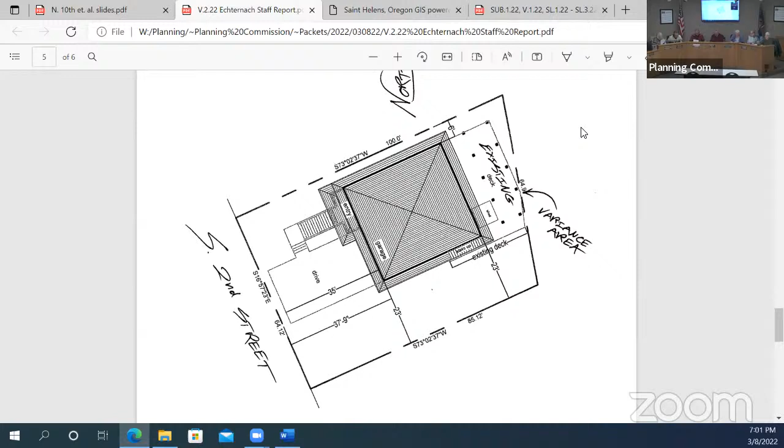7:05. Wrong, also I don't think it's 7:05. The variance is the—7:05 is variance. I'm sorry, I got it wrong. Yes, wrong one. Yeah, but you don't have the script. No, I don't, but I do have the 7:30. There it is, I'm sorry.

Started. Okay, I never want to share. Somebody, you can give a comment. What's the first here now? The talk minutes—well, I'll figure out the script from here. All right, start it again.

The time is now 7:02 p.m. The public hearing is now open. It's a quasi judicial land use hearing. The subject of the hearing is a request for a variance. The subject property is identified on the county assessor's map as lot 900 on map 4N 1W 3DB. The applicant is Jay Echternach. The owner is Jeanette Nelson.

Because quasi judicial proceedings require the observance of certain procedural formalities, we will take a few moments to cover some preliminary matters and required statements. Do the three members of the commission wish to declare an ex parte conflict of interest or bias in this matter? None? Does anyone in the audience object to the ability of the commissioner to make a fair decision? None.

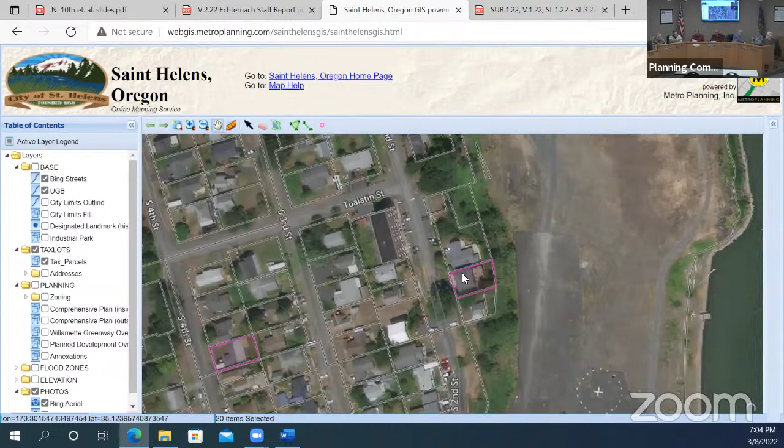There is an ability to raise an issue, including constitutional or other issues relating to the proposed conditions of approval in this hearing, in person or in writing. Failure to raise an issue accompanied by statements or evidence sufficient to afford the approving authority an opportunity to respond to the issue precludes appeal to LUBA, the Land Use Board of Appeals, on that issue, and precludes an action for damages in the circuit court.

All right, staff report. Thank you, Chairman. So tonight we're looking at a setback variance, and this map shows kind of where we're at. So this is South Second Street, just south of Tualatin. You might know this area by the salt staircase that goes down to the St. Helens owned property near the site down below. So this is the block we're looking at today, and the subject property is right here, where my cursor is.

So on this property in 2008, the city approved a demolition permit for an existing single-family dwelling, and shortly after approved the building permit for reconstruction of a dwelling at about the same footprint. At that time, it had a rear setback of 10 feet, which is the appropriate setback for this residential zoning district. Also at that time, because this is on South Second, it was reviewed under our scenic resource review chapter, which reviews new development over 15 feet in height or 2 stories, which this development is. So at both of those times, the setback was 10 feet.

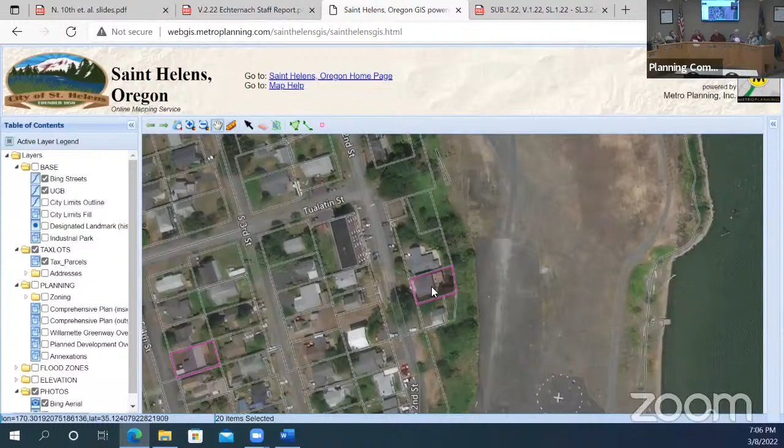More recently, we received a building permit for work unrelated to this deck that we're going to talk about a little bit later, and noticed this plan, which showed the existing deck right up to the property line, so it had a 0 rear yard setback. So sometime between 2008 and now, a deck was built and it didn't comply with the approved permits we had on file for the site.

The deck wasn't built by the current owner. Jay will give testimony. He bought the house more recently and didn't build this deck. So now we are trying to bring this home into compliance and review it with this setback.

Like with all variances, we go through the criteria, and the applicant provided a narrative along with some staff comments throughout the staff report. I'll highlight the ones I think are of relevance.

The first criteria talks about detriment to surrounding properties. I'm going to pull up our GIS to show the surrounding area. The property to the north has a deck at basically the same footprint as the subject property, so it has a similar reduced rear setback. The property to the south also goes up to, and maybe even encroaches onto, the city property with their deck. So there's precedence along this block that utilizes every bit of that yard space.

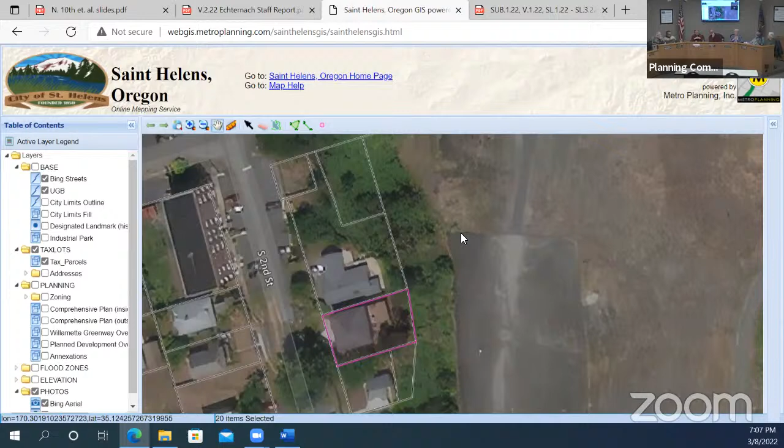Obviously it's got amazing views of the river, so it makes sense that they would want to utilize that area. As far as detriment to the abutting neighbors, arguably they're under the same circumstance, and that's what staff notes under that criteria.

There's also some photos from the deck where you can see the alignment of the deck that's built, looking over to the deck there. You can see those in the staff report. There's also no visual impact to any other neighbors on South Second. You can't see the deck from anybody in the surrounding apartment residential zoning district, and you obviously can see the deck from the city-owned property, and there's some photos of what that looks like.

There's a 60-foot drop-off between this property and the city-owned property down below. So if you look at the next criteria, I talk about how in other zoning districts that difference in topography can actually be used as a setback.

In Houlton, and in the Plaza sub-district for the Riverfront district, it says that when you have uses that are more than 30 feet above proposed commercial uses, then the height of the topography counts as part of the setback. For example, if you have a 35-foot bluff behind a commercial building, it's the same as having a 35-foot setback. That doesn't directly apply in this case, but it gives the commission a way to look at great differences in topography in terms of setback requirements.

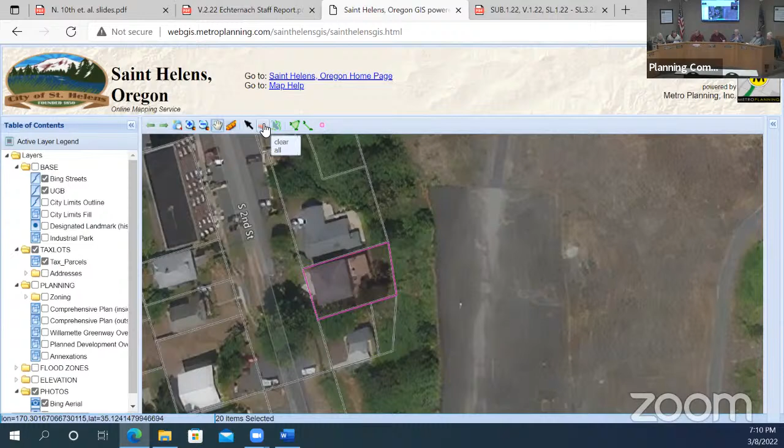Existing plans that the city approved show a smaller deck. Yeah, they approved a 10-foot rear setback.

What is the code section that would allow us to grant the variance? The same code: 17.108.0501. Can you say it one more time? Yeah, it's in the staff report, 17.108.0501. Find it—yeah, it's on page 2, right here.

One thing I would note on this GIS aerial shot is the buildings and property lines in the aerial photo aren't quite aligned, so they're not, for example, that close to the front property line. They're a little skewed there. Runoff doesn't start at that back line—it does, it's right about here.

Basically this deck is shifted; this aerial image is quite awful, honestly, but it does show that this is in line with other neighboring decks. That was the purpose of bringing it up. Also, those three properties are the only properties on the east side of South Second, so there's not a whole lot of impact to surrounding neighbors because it's only two.

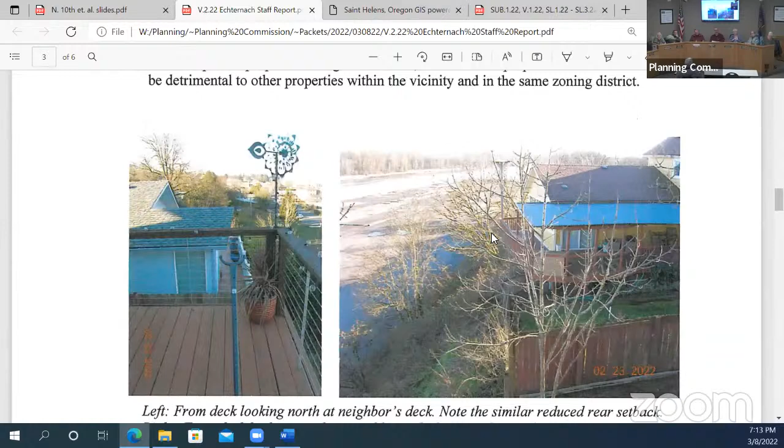I might add, those pictures aren't really revealing the truth. My neighbors to the north and south — I would argue if you went out there, not only is their deck on the property line, but their house is on the property line. So if I'm encroaching by a deck, theirs is slightly more egregious, and I'm not here to defame them. I'm just trying to put it into context.

The view is spectacular. I've met both neighbors. They saw the variance report. They encouraged and were excited for us to be in the neighborhood. So I appreciate your consideration.

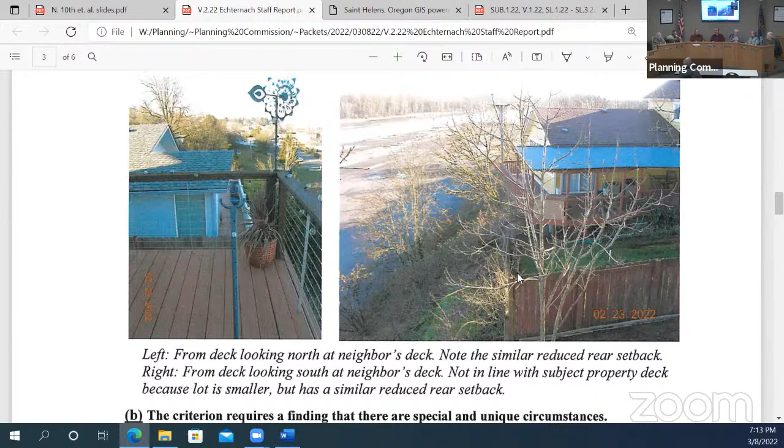Questions of the applicant? Thank you, appreciate it. Is there anyone that wants to testify in support of the application?

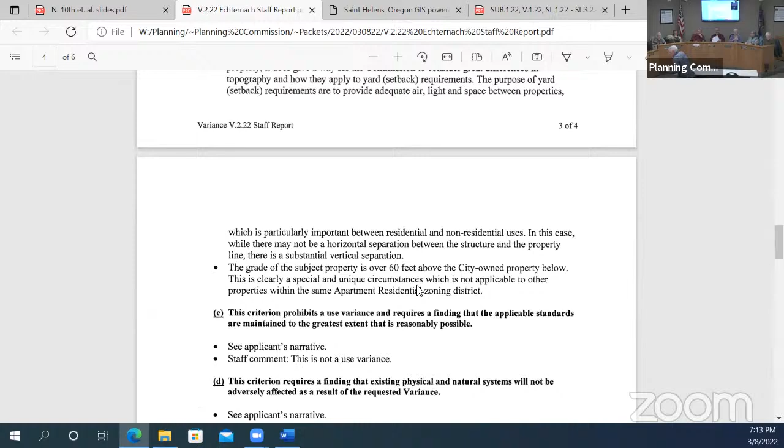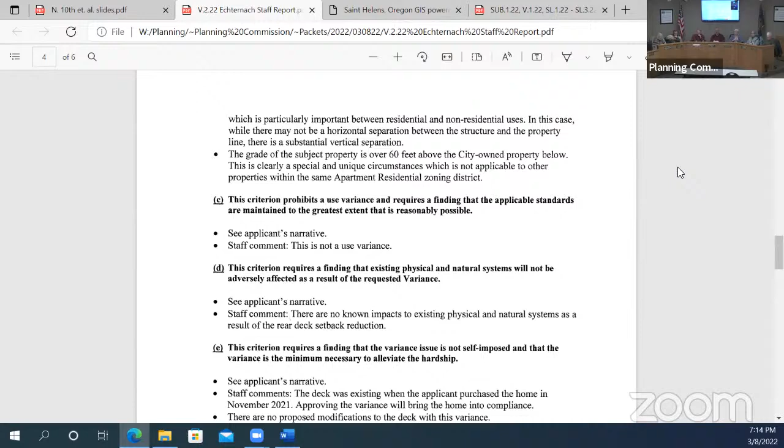Anyone that would like to give neutral testimony, neither in favor nor against? Anyone who would like to testify in opposition to the application? All right.

No further questions to the commission. No further responses to staff. The public record is closed. The matter is returned to the table for deliberations and oral discussion.

We can add a little bit of context. This home was approved for tear down and rebuild back in 2008 or so, maybe 2009. At that time, inspections were done differently — the building department did the inspections, and planning did not. This isn't the only time I've seen a deck that's made me go, huh, this is interesting. We actually had some houses on Snow Street in the Ridgecrest subdivision with decks that got really close to a protected area and weren't on the original plans, and anyway, it was kind of messy. So you could argue it was a messy way of doing things back then. We do inspections with the building department now.

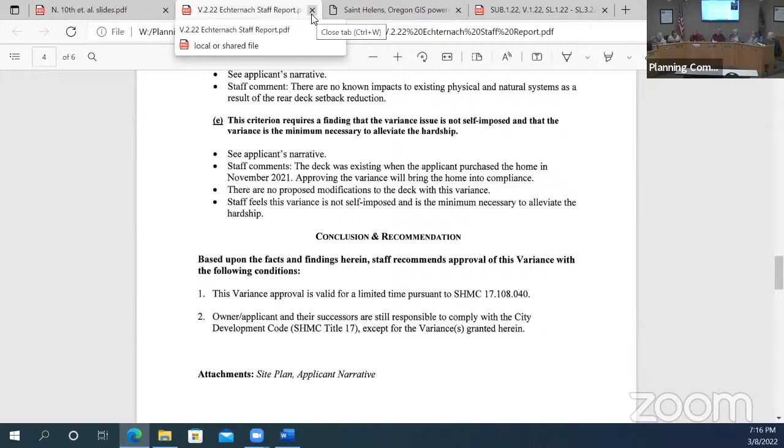Oh, I have to read one, sorry. The final written decision of the planning commission may be appealed to the city council. The notice of decision will be mailed to all persons who testified or submitted comments. The appeal deadline will be included.

Okay. Now I got the right script for the right thing.

It is now 7:17 p.m. The public hearing is now open. It's a quasi-judicial land use hearing. The subject of this hearing is a request for a planned development. The subject property is identified in the county assessor's map as lot 700 on map 5N1W33. The applicant is North 8th Street LLC. The owner is the same.

Quasi-judicial proceedings require certain procedural formalities. We'll take a few moments to cover some preliminary matters and required statements. Does any member of the commission wish to declare an ex parte contact, conflict of interest, or bias in this matter?

I'm not going to declare a bias, but I will declare that I applied to be a member of the Elks Lodge, and this has not come up. And I'm not going to declare a bias, but I will state that I don't think it's going to affect me in any way.

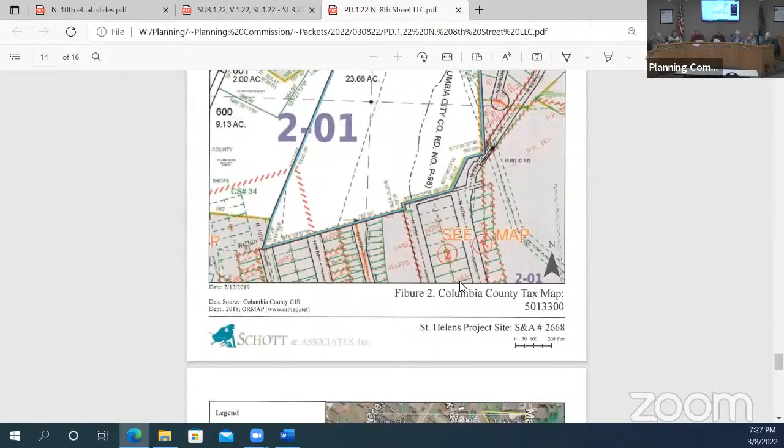The other thing I want to note is that one of the important bases for allowing this is the wetland encumbrances. This is the approved wetland delineation from the Department of State Lands, and you can see there's quite a bit of wetland complex on the east side. As you saw with that proposed plan, a lot of that's being preserved. But you do have wetlands on the other side too, that have to be mitigated. So there are just a lot of wetlands going on. It makes sense to have that overlay so someone can have an economic use of their property.

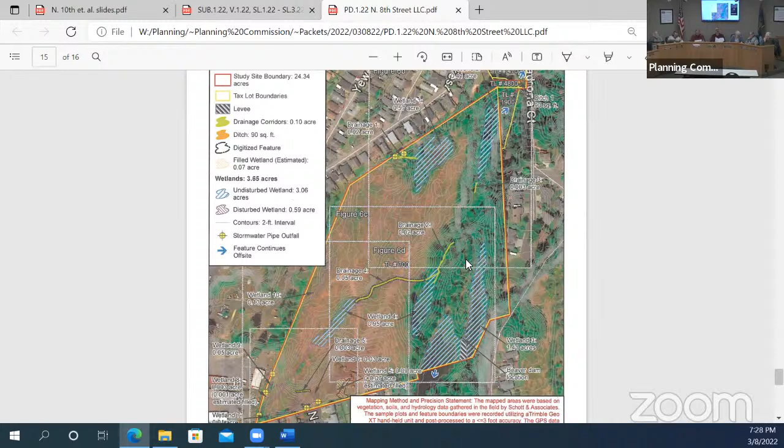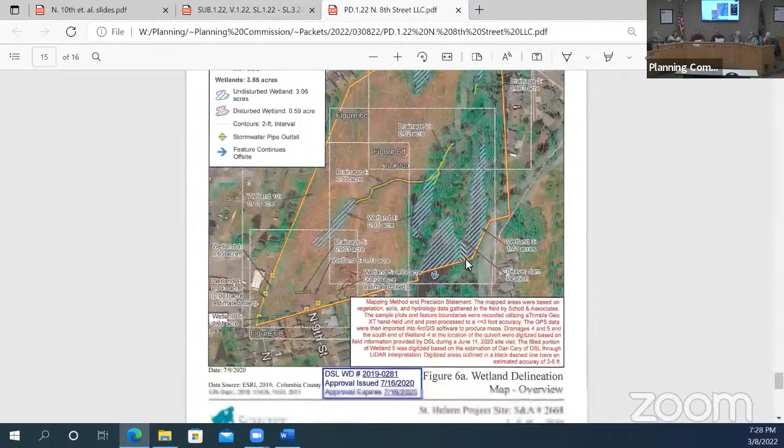Because this is an overlay zone, I know there's always temptation to want to talk about the streets and the lots and all that stuff. But remember, this is a zoning map decision, not the subdivision decision itself. And that's what I got.

Questions of staff at this point, what you said, applicant? I have one question. So, Jacob, the concern of precluding mobile homes—that would not be allowed?

That's correct. So what that means is that overlay zone enables us to apply flexibilities. And if it was approved as recommended, the caveat is we want to make sure it doesn't preclude manufactured homes. So any development, be it this one or development B in 2 years, we would need to check that box.

So spot zoning or something like that? You could consider it like that. This land was kind of set aside for that purpose, and it would be kind of like washing away the spot, I guess. So yeah, you could consider it akin to spot zoning. That's what I kind of got from you.

Thank you. Could you clarify what the planned development overlay zone allows them to do differently than the zoning that it is right now?

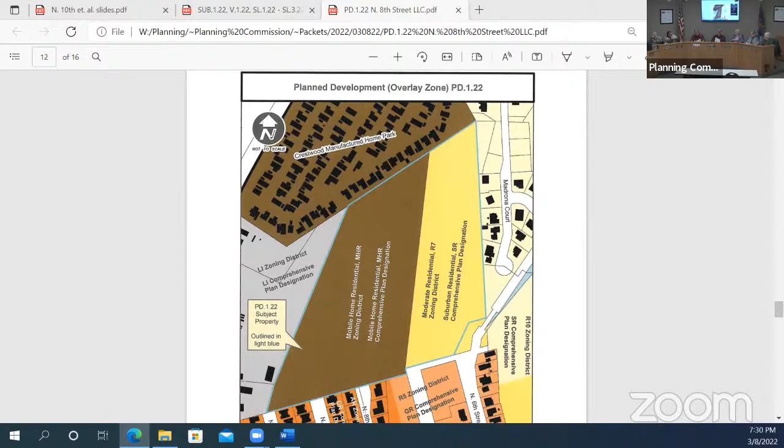Sure, let's be clear on that. They have a table that shows some of that, and it summarizes it really well. The main thing I'd focus on is the standard on the very left, and then the second column from the right is the plan development overlay flexibility. Where it says yes, it does allow flexibility; where it says no, it doesn't. So for minimum lot size, they could pick a minimum lot size less than the normal standard, which would be 5,000 square feet. They could say there is no minimum lot size, or they could pick a smaller number. Same with the lot dimensions.

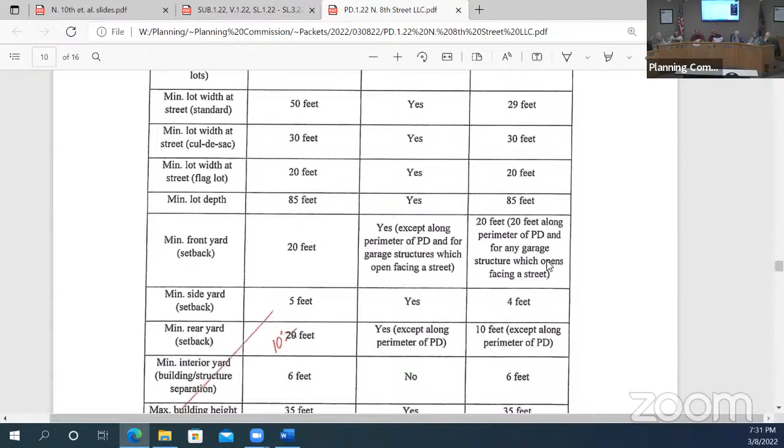And yard requirements. Now, there are some things that cannot be exempted, and a critical one that an applicant needs to think about for their final product is lot coverage. That maximum lot coverage cannot be amended, so you don't want to create extraordinarily small lots where you're still subject to that 40% lot coverage, and you're going to have not just a tiny home, but a super tiny home.

Are we then on this one doing the manufactured home zoning with R7 on part of it, or are we just doing the overlay? This is the overlay. Okay, so the underlying zoning stays the same. We're adopting the overlay, and these standards here are what they're proposing.

Right, I read those. But if this project didn't make it, or they just gave up on it, someone else came in, they could apply their own set of standards as allowed by the plan development overlay.

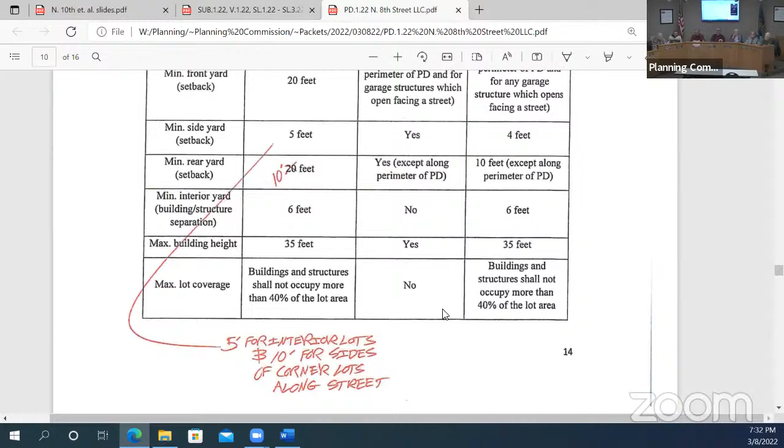So Jacob, the example of the plan that we're not talking about yet shows not full use of the property. There's a lot of open space. Doesn't a plan unit development require some open space? You can cram it all together here, or you have to have some open space from another part of the property. Is that how that works?

Well, the city of St. Helens, in its older version of the plan development standards, had some mandatory minimum open space. You've encountered some of that because we still deal with those old decisions. Meadowbrook is a good example we've dealt with recently, approved under those old standards. This one doesn't explicitly have a minimum open space, although in the state's definition of plan development, it says usually there's open space associated with it.

But it's common for us, because it's a good tool for properties encumbered with wetlands, that the wetlands end up being that open space. Are you saying that with the overlay, we're basically deleting other requirements of setbacks and minimum lot square footage, and enabling a developer to make that decision? Yeah, so you could adopt the overlay, and let's say they walk away, someone else comes in and says, I don't want those flexibilities, I don't want to use it. Then it just sits there, but it does enable those flexibilities as highlighted in this table.

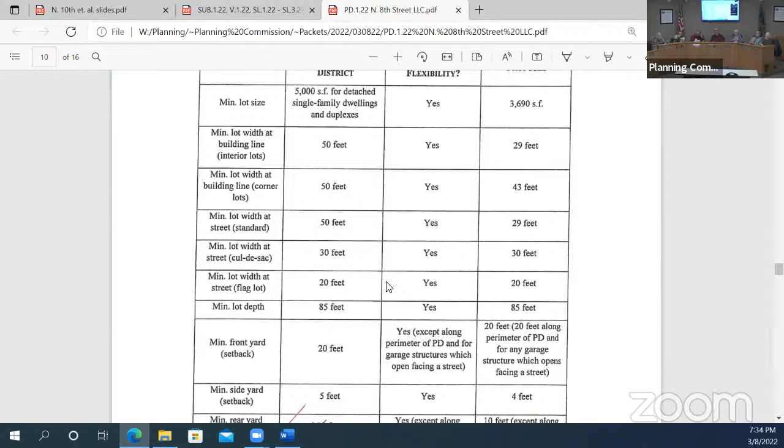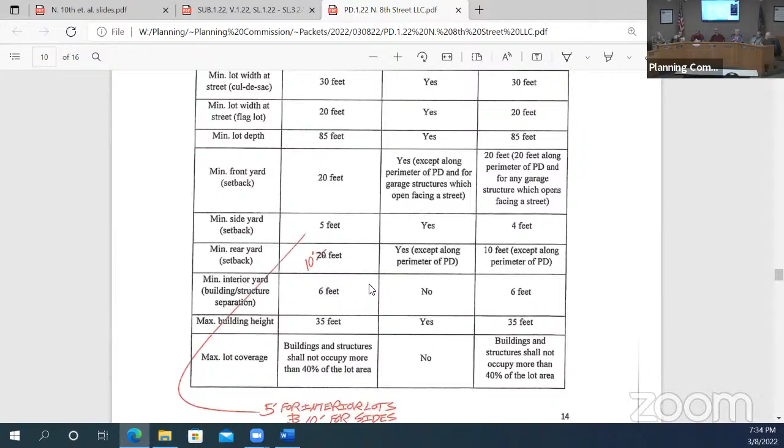And an important thing to consider is density. That's a very important tool this plan development overlay allows, when you have all this encumbered area, to try to meet a reasonable density based on that. In this case, their density calculations show over 100 lots possible, because there's the wetlands, but then there's all that non-wetland area in between the wetlands. That, if you're just doing a calculation, is fine, but to work around the wetlands, you'd have to impact them.

Without that, they wouldn't get very close to even the density proposed. Any questions of staff?

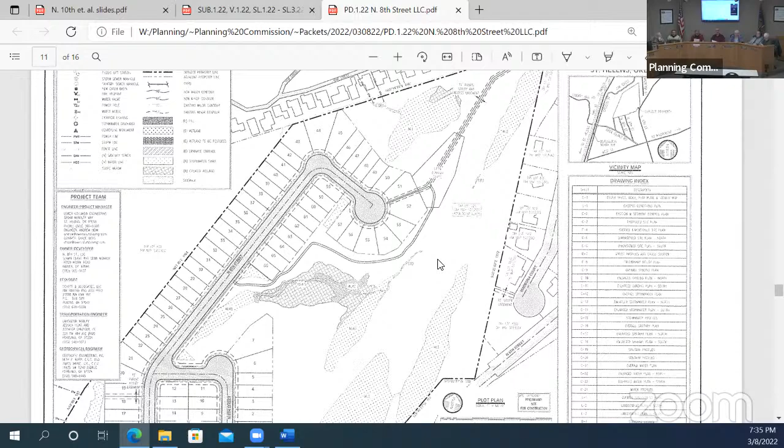Let's hear from the applicant. Good evening, folks. Good to be here in person and see everybody.

I won't get into too much detail. My name's Andrew Neamy with Lower Columbia Engineering. And I'm Chase with Lower Columbia Engineering. I think staff did a great job describing the proposed application. The only thing I'd elaborate on, and I'll try to refrain from getting into the details of the next hearing, is Jacob's point about the densities.

We haven't been involved in this project throughout its duration, but when we stepped in, it was in transition, with the required joint permit application process needed to allow impacts and work around the wetlands on the site. It was realized that the density previously proposed was too aggressive, and it was going to have, even in a short version, a long drawn out and complex process.

But in quick summary, the previous density was really going to be hard to permit at the state and federal level. Based on, Jacob, to my understanding, bringing up this option with the overlay zone, that afforded us the ability to have a bit more flexibility to minimize the impacts to those wetlands. So basically we regrouped and came up with a proposal with less overall density through this overlay zone option, allowing for less impacts to those wetlands, which I think is a win-win. In my opinion, it makes the property pencil out as feasible for improvements, striking that balance between utilizing the property and minimizing impacts to the existing wetlands.

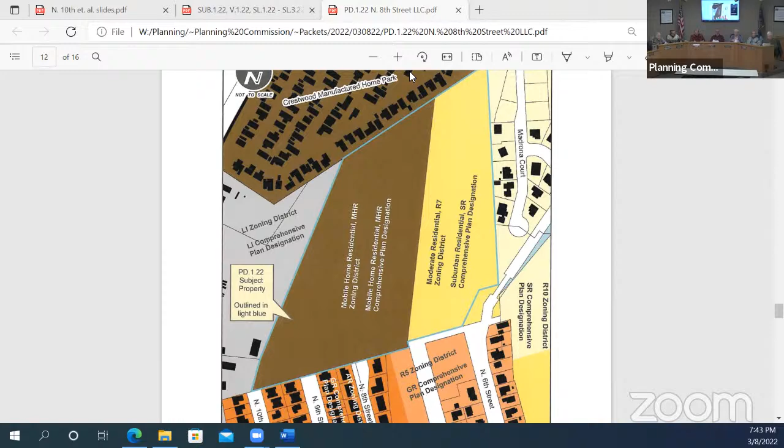Notice of decision will be mailed to all persons who testified or submitted comments, and the appeal deadline will follow. For this decision, we need a recommendation. Yeah, so this overlay will go to the council on April 6th.

The subdivision that we'll tackle in the next public hearing is within this group's authority to make the final decision. I know it sounds wacky, but to make it clear, the things these people presented today are in our jurisdiction, or will they go to the city council?

The hearing we just had for the overlay zone needs to be approved by the city council because you need an ordinance to amend the zoning map. The city council approves ordinances, not the planning commission. So if what we have done so far has disturbed somebody, they can come to the city council and express what they want.

So by 8 o'clock, is everybody here that wanted to be here for this hearing? This subdivision? They went outside - go with them. Everybody's here, I think they're back in.

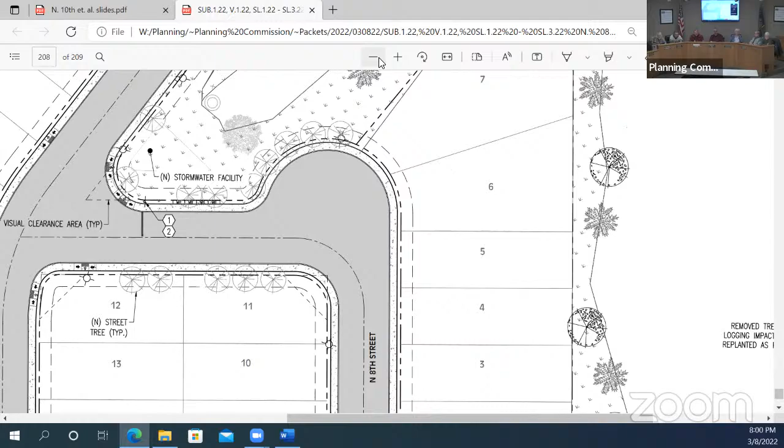Wait till 8 o'clock. 7 seconds according to my watch. I'm going with that clock. She's on it - 10 seconds off. 10 seconds off, yeah. Time is... clock went. Computer says 8.

Public hearing is now open - the quasi-judicial land use hearing. The subject of this hearing is a request for a subdivision, preliminary plat, subdivision variance, and sensitive lands permits. The subject property is identified in the county assessor's map as lot 700, 1900, 1901, on map 5N1W33 and 5N1W. The applicant is North 8th Street LLC. The owner is Sean Clark, Deanna Womack, and Elks Lodge Homeowners Association in St. Helens Lodge, number 1999 BPOE.

Because quasi-judicial proceedings require the observance of certain procedural formalities, we'll take a few moments to cover some preliminary matters and required statements. For this, does anyone wish to declare ex parte contact, conflict of interest, or bias in this matter?

I declare that I've applied to be a member of the Elks Lodge. I didn't know anything about this application at the time I applied, and I had not had any ex parte communications with anybody about it, and I don't think it's going to affect me. As I said in the previous hearing, I work for the Oregon Department of State Lands as aquatic resource coordinator, which means I'm the permitting guy for this county, and I was heavily involved with the permitting for this development as proposed today. I will try to keep my comments strictly to the proposed development, and if the applicant has any issue with me being up here on the commission, please state so. I do not. Okay, all right.

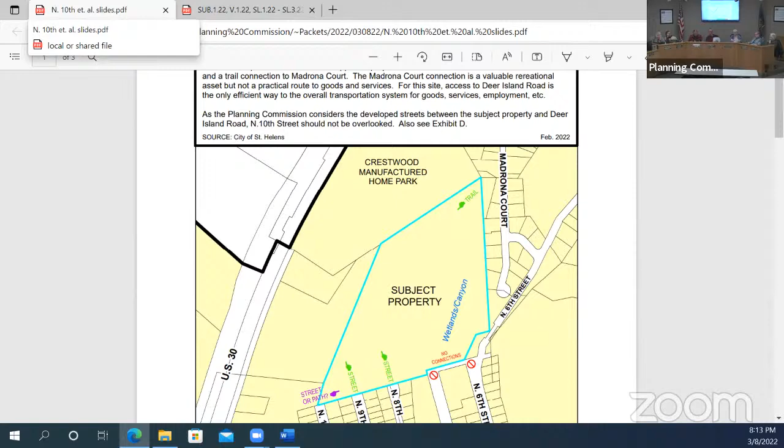Another thing to discuss, and I'll talk about this in greater detail at the end of my presentation of the staff report, are blocks. We have standards for the maximum perimeter of a block, which is around 1,800 feet. You have to use your imagination so we don't flip through a bunch of slides, but most of you probably know, especially those who live on these streets, that the 8th and 9th Street legs terminate as a segment of those streets between Deer Island Road and the subject property. That creates a partial block, and they are completing that block, with a perimeter a little above what's allowed. That's fine, the code says when things are funky we can give some of those allowances. No issue there, it's great that they're completing the block.

We do need to talk about the block bounded by 10th and 9th Street, but I think that's going to be easier to compartmentalize into discussion at the end, when we talk about 10th Street. So we'll get into that later.

Utilities, let's talk about utilities really quick. Water is easy, it's available from 9th and 8th streets, and water is pressurized. If the others were only that easy.

Sanitary sewer is not so easy. I think the applicant would love to be able to extend the sewers that are right there in 8th and 9th Street, but the problem is they're just too shallow. As you know, that old saying, 'it runs downhill,' and that's how it works in our system. So when it's shallow and you have all these homes, you don't really have any downgrade to go with. So the applicant had a couple choices. The option they're pursuing is connecting to the pump station, or near the pump station, in Madrona Court.

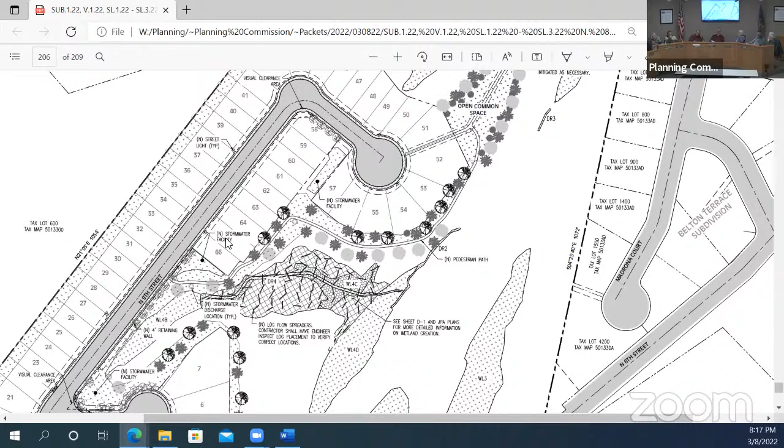Then there's stormwater infrastructure. Storm is commonly a concern of neighbors in subdivisions, and in this case you're not only dealing with the storm, you're dealing with the health of the wetlands. So you'll have your typical piped infrastructure for conveyance purposes in the street, and then a variety of vegetative bioswales, 4 in total, which are identified there - 3 of them on the east side, and 1 on the west side.

If you read the report in detail, you'll see that the city does not want ownership of those, but we'll take ownership of anything in the street, which is typical. So that's how stormwater is being handled. We do have a preliminary stormwater report, but we will need a final report, which is typical of subdivisions following some preliminary plat approval. So that's a brief on utilities.

There are a couple different methods to complete the subdivision and be able to get building permits. For a long time with the city, it was complete everything, and then we can get your final plat recorded, and now you have a bunch of lots. That changed in 2020 when Oregon House Bill 2306 was passed, which means we have to allow an option for certain things to not be done to allow that final plat, and it just involves more financial guarantees. In the city, we still haven't had someone pursue that option, but it's written in the decision. So if you were reading a bunch of stuff that looked kind of weird and it referenced that House Bill, that's what I'm talking about.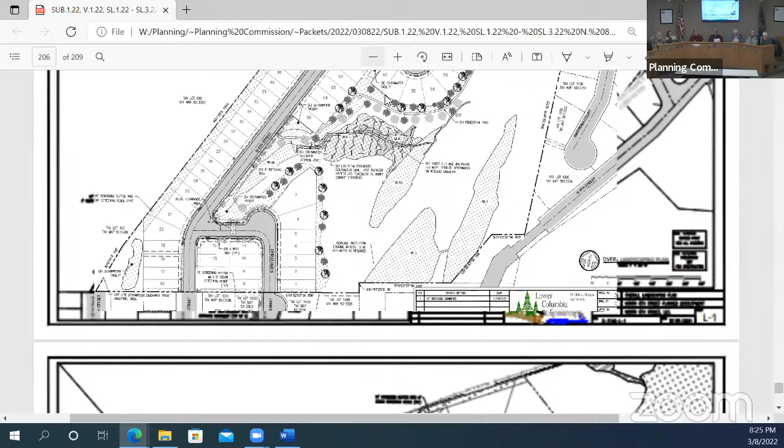Let's talk about the subdivision variance really quick. Let's scroll out a little so we can see the whole plan. The subdivision variance is for the cul-de-sac. Our normal standards call for a cul-de-sac no longer than 400 feet, providing access to no more than 20 dwelling units. In this case, the cul-de-sac exceeds 1,000 linear feet and provides access to 44 lots, so it's much larger than our standards, which is why we needed the subdivision variance.

Because of the constraints for the wetlands, the justification for the variance, as far as staff sees it, is there. They really got hammered trying to get something to work, and it just so happened that everything was forced to the west side, resulting in this layout that you see here. So as staff, we're not frowning on the variance.

There's one thing of note and one thing of consideration regarding that. One is good old Oregon Fire Code raising its ugly head, section D107, which is described in the report. Once you have a certain amount of lots, I think more than 20, with only one access, they are required to have a sprinkler system. In this case, because of the particularly long cul-de-sac, it creates that situation. If there was a secondary fire access from somewhere, that could remedy it, but a fire access needs an all-weather surface, 20 feet in width, which is a lot more than a sewer line and a trail. So the sprinkler issue just kind of presents itself in this design.

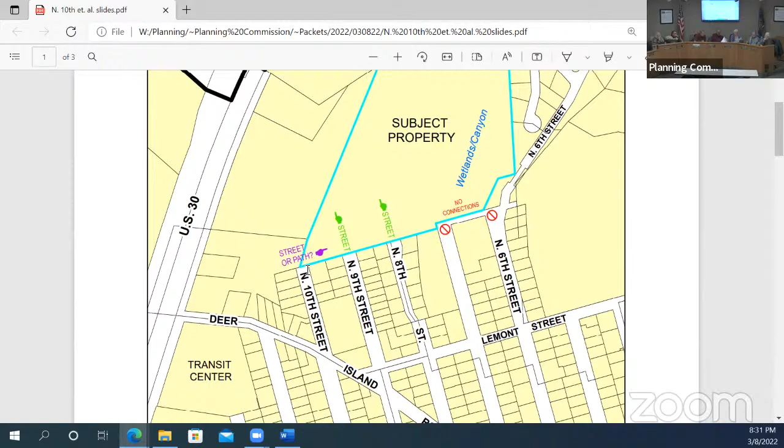This subdivision was really complex. In some of our preliminary meetings, there were comments here and there about needing to think about 10th, but we never really hammered that out—we focused on a lot of the other stuff. What we do with 10th can relate to how we look at 8th and 9th Street and all these new impacts on those roads.

In this exhibit, I'm going to talk about four potential options for the Planning Commission to consider. This is talked about in general in the staff report, but it's not organized the way I'm organizing it for this presentation.

The one thing that's automatic is to dedicate the right of way—that's why I have this highlighted in yellow—to advance the northerly extension of 10th Street. That's easy, I think that's on the table regardless. There's about 47 feet of the 10th Street right of way that abuts this area. So that's at least what I see as a default condition.

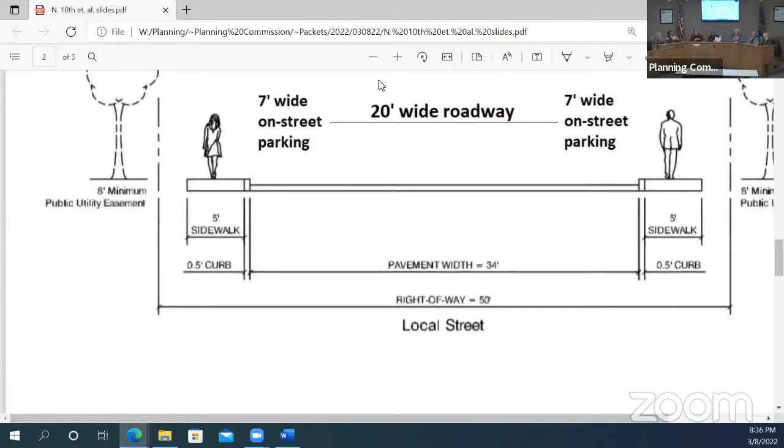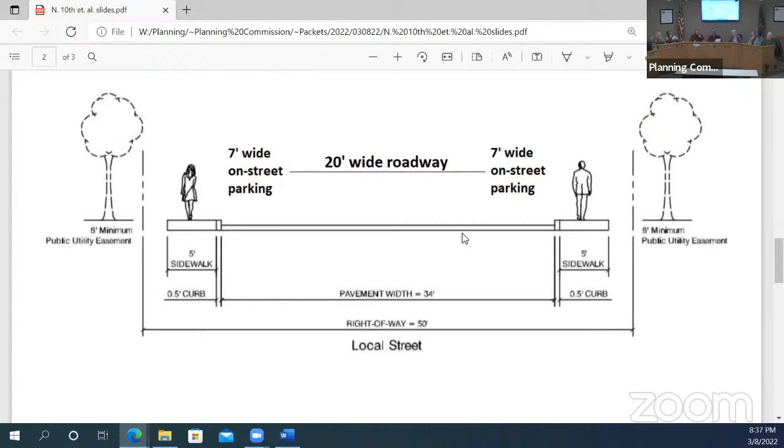So if we go to the next slide, there's two things to talk about here. This issue we're transitioning to is, let's look at 8th and 9th Street now and think about what this is gonna result in. To do that, we have to look at our local street standard, illustrated here: a roadway width of 34 feet, for a 20-foot roadway with parking on either side, and a standard 5-foot sidewalk. So that's our base that we're comparing existing conditions to.

So the question here with the new anticipated traffic, should that be considered? One thing to think about is the level of stress for a pedestrian. Say you have a 23-foot wide area, and it's not 23 feet wide everywhere, more pertaining to 8th and 9th Street. But say you had a lot more traffic and a 23-foot wide paved area with a couple cars coming by, that leaves 3 feet of area for the pedestrian on the same grade as the vehicles. Higher level of stress.

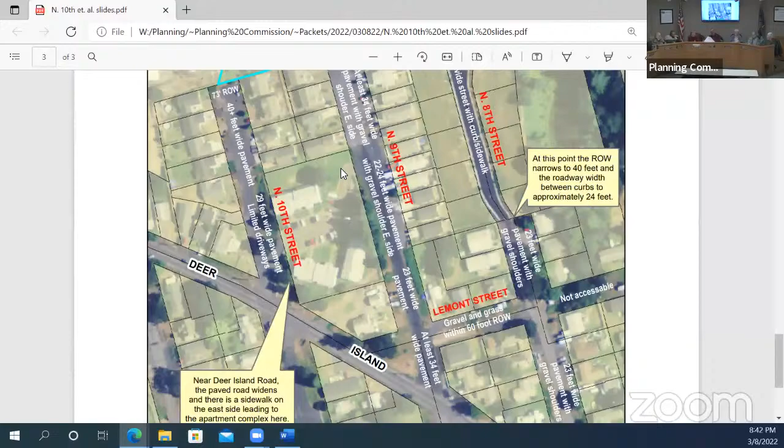Talk about an easement, halfway from this street over toward Bluff Street, two blocks. And it wouldn't have to be there, it could be at the southern end of lot 16.

So how are you gonna close that? There are wetlands. That wetland is not the existing one, that is proposed manipulation of what is there now.

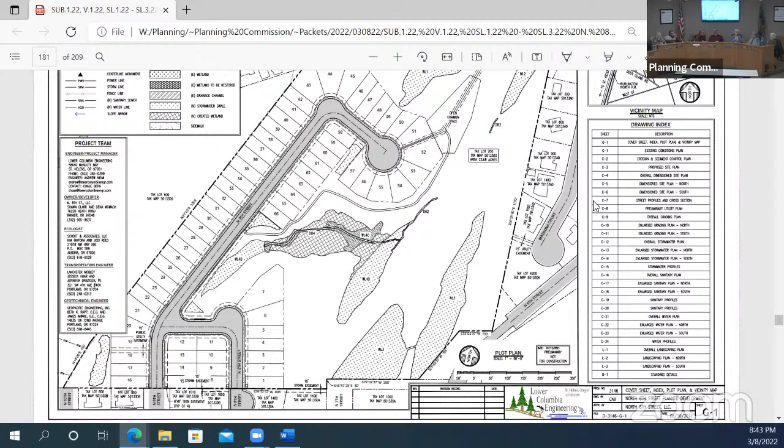So that's what's existing. You can see that the proposal is to manipulate what is there. This is a preliminary proposal, subject to change based on the requirements of the code as set forth. So there's an opportunity to manipulate, at least as far as I know. We'll see how the applicant responds to that.

We can ask more questions later. My question was, why don't we ask specific questions so that we're about the application? We can ask specific questions down later.

Let's have the applicant's presentation, and some testimony from the audience. People have been waiting patiently.

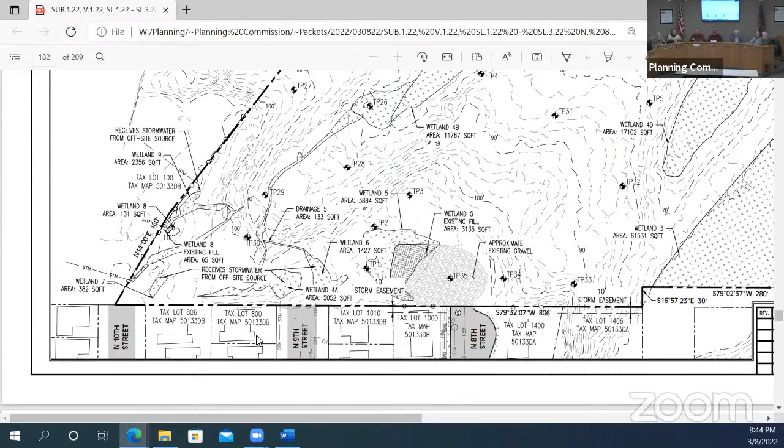Just let me know which one you'd like me to go to, if any. Probably back down to where you were at there, Jenny, on that landscape plan. Okay, give me a second.

Jacob, excellent job on a very complicated staff report. As you guys mentioned, this is a project that's been contemplated by our client for years, and we're a recent addition to the team. Prior to our involvement, there was a much more aggressive proposal in consideration with some of the state and federal agencies with regard to impact to the wetlands.

This is a much less aggressive approach. We're probably walking a fine line between something that's feasible economically, because the densities are pulled back quite a bit from what you'd typically go after in designing improvements to a piece of property like this. And of course, there's a lot of costs associated with working around these wetlands and the bedrock that is inevitably going to be dealt with on site. So we're walking that line between a project that is or isn't economically feasible.

So we're trying to minimize the amount of intangible expenses in the design process, with regard to what could be proposed. Like I mentioned, much less dense, so those traffic impacts will be less than they could otherwise be.

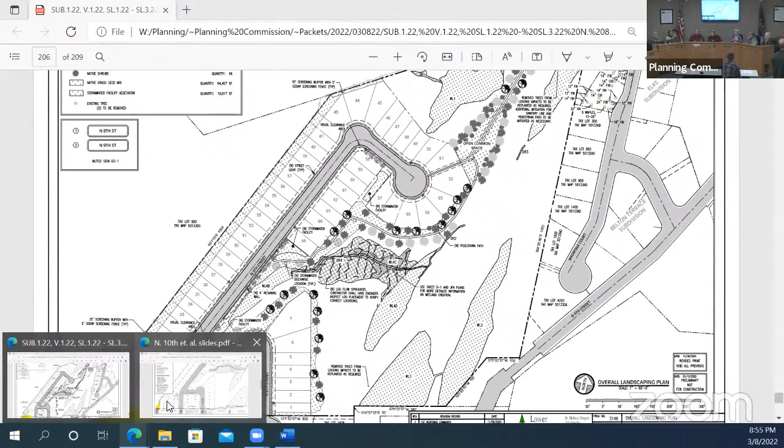I'm just throwing this out here. I don't know the developer's thought about this, but the feasibility of some kind of fee on the buyers of the properties to try to fund the sidewalk project or something like that, so that residents of Ninth Street have some sidewalk to stand on, walk on, with the potential extra traffic. I'm just throwing that out there as a question.

So all I'd say to that is that, with a project like this, the developer's already building a significant amount of public infrastructure, sidewalks, utility improvements for the benefit of the public. And I believe — I think that would be a hard sell to any developer. I've never met a developer that's excited about offsite improvements.

The idea wasn't that the developer would take on just a fee for when the lots are sold. I don't know, we can take a look at that. Andrew, has the city ever partnered with a developer to help them? It's quite a long street, both of those that would need sidewalks and everything. Any projects you could think of that have partnered with you?

Not that I can think of. Developer, yeah, that's not what I'm suggesting. I'm suggesting put it on the buyers.

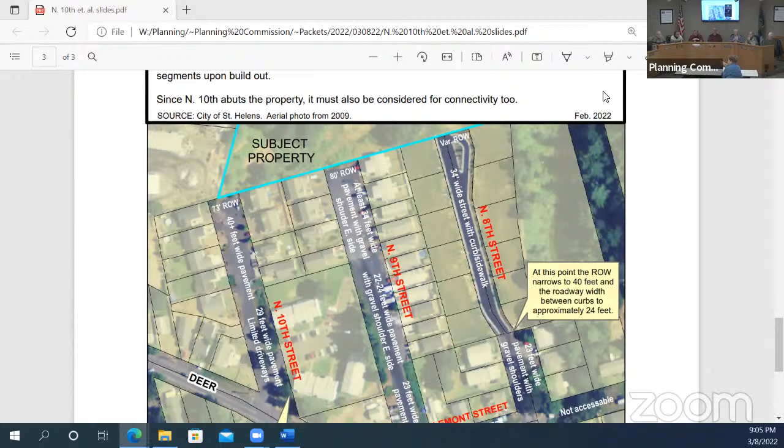Well, it depends on which wetland it is. A couple of the wetlands are city—it's right off of Eagle Lake Bluff, that section right there. Oh, the pond, yeah. Those are city wetlands, so you could talk to us, but they're also wetlands of the state.

I heard that ODOT was the one that had something to do with that—that's one of the answers I got when I was trying to figure out who. Well, I think I can answer that. Some of the wetlands on the site are proposed to be impacted with the development. Some were inadvertently impacted prior, and they've been resolved. Any future filling, if it doesn't fit the plan or their permit with the state, someone would probably like to hear about it right in this area.

Want his home address? Yes. Thank you very much, I appreciate it, because that was our major concern.

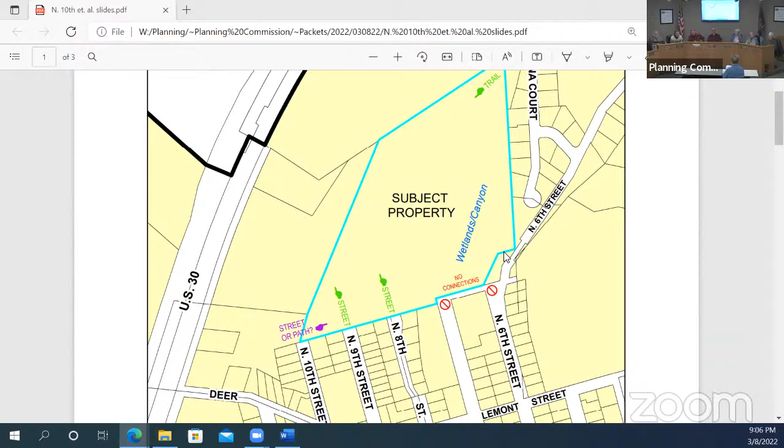I agree with our neighbor that, you know, if we could do something with the county property on 10th, because we have a lot of children in the neighborhood, and we're on that section of street that's like 20 feet—well, actually, when you get 2 cars parked on either side of our street, we probably have a 14-foot drive, so with big trucks coming down, it'd be dangerous. Thank you so much.

They're neutral testimony, I thought I saw it. Matt Duffy, and I live at 245 Madrona Court, which is lot 8.

Can you scroll up some, please? Let's see, keep going. Okay, so basically right here—yeah, right there. So really, I just have a couple concerns.

So we have a lot of, when it rains, water that literally comes up to our property, and where it actually goes under the road, it goes over the road. I'm sure there's going to be a bigger pipe put in to allow the extra water to go through, but I just want it out there that we already do have water that comes up to the house—well, 25, 30 feet away from the house when it's really bad.

So that's a concern. Whether the wetlands are affected by the digging for the sewer line and adding that in. And then I guess the trail—is it the city that has something to do with the walking path that's going in? Do we know? Well, it's proposed by the applicant, and it's proposed to be a public easement, thus a public trail. Okay.

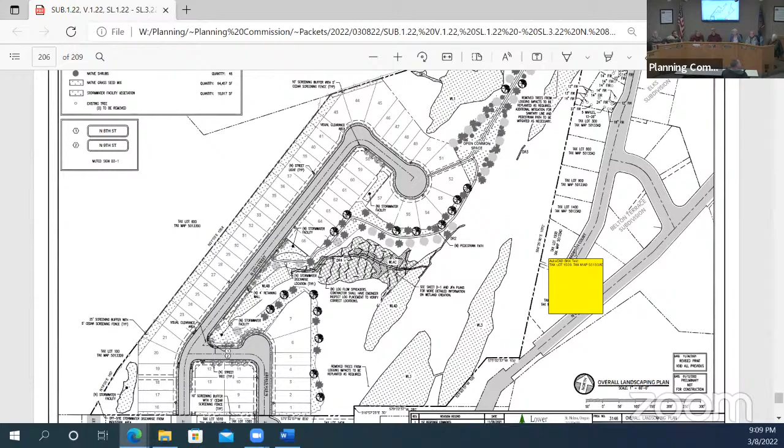If you could go to C1 again, that top plan. Let's have topography on it. Right, looks like you could see that rock pile. Right house. It's this one.

You can't see where the sewer line is gonna be placed, but it'd be right against the property line. I believe that sewer line goes through our property anyway, which isn't really my concern, since it's gonna be the Elks property. But see, next to the road, those topography lines? That looks to me like a berm of rock. It's a high mound, yeah. It's rock and dirt, but mostly rock.

So that wouldn't actually be affected at all. It's not on the Elks property. Where the cursor is, is where the sewer line would be built. Yeah, that mound would still remain.

Okay, so it sounds like you guys are coming to the south of basically the drain on the road, which is a little bit almost directly across from the pump station. Correct? Yeah, you can see the pump station right here. We are coming in south of that, and then the new sewer line would come into Madrona Court, I believe a new manhole there. Yeah, and then it would jog northeast to the existing pump station.

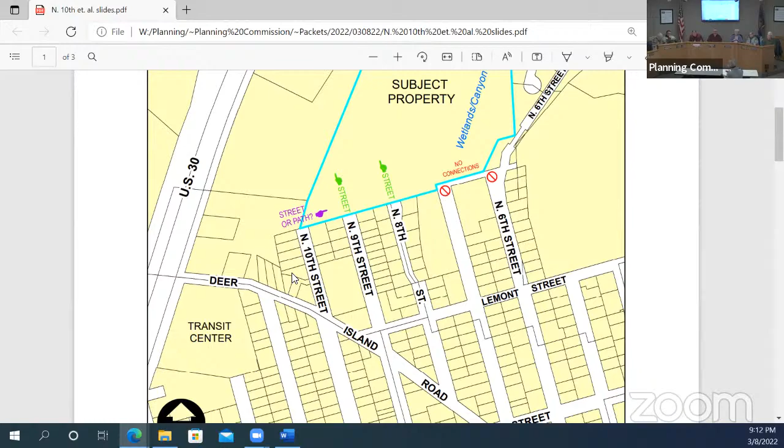I'm Joanne Rockwell. I live on 8th Street. I have a concern. When they first started clearing the said property two summers ago, 8th Street was what was being used for going in and coming out of the dump trucks and all of the excavation, wood chippers, everything else that was coming in. When you enter the cul-de-sac on 8th Street, the road narrows and there's a crook in the road, almost what you consider a bottleneck.

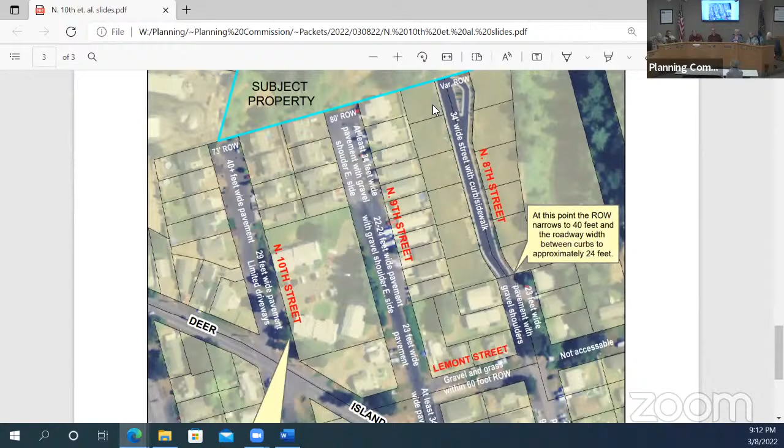And we have houses on both sides of that bottleneck, and people that not only use their driveway but also park on the street itself. There was one dump truck coming, that's all that could come in or out. You've got them lined up in back of you, and residents trying to come in and out of the road. It's a complete standstill because you've got dump trucks lined up where only one vehicle, whether a dump truck or a regular car, can get through there. So it's going to be a complete jam up.

We saw it two years ago, and we're just getting started on this whole project here. So it is a great concern. We also, like the little lady mentioned, have a lot of children in that cul-de-sac. I have more concerns going forward, but for right now that's my main concern.

Is there a possibility? I don't see a possibility for it being diverted, but is there a way where we wouldn't have this position? Is there a way they could widen or straighten it, because I see a complete bottleneck jam up and a lot of unhappy people.

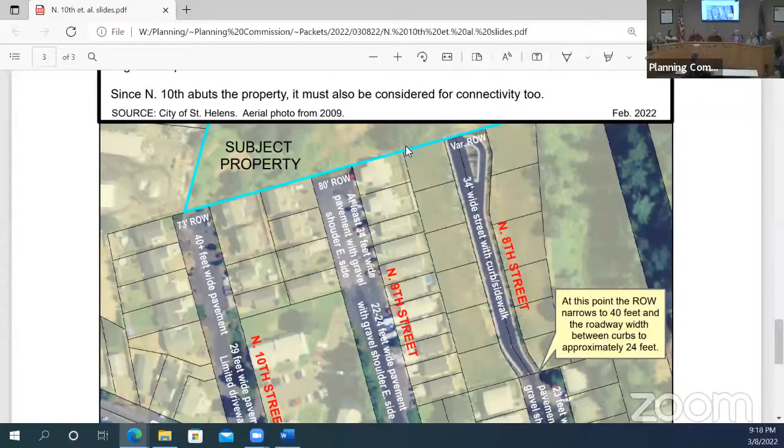Yeah, I mean, I don't want to speak for Sean, but my personal opinion is that I believe there are other fee structures in place that address off-site sidewalks such as that.

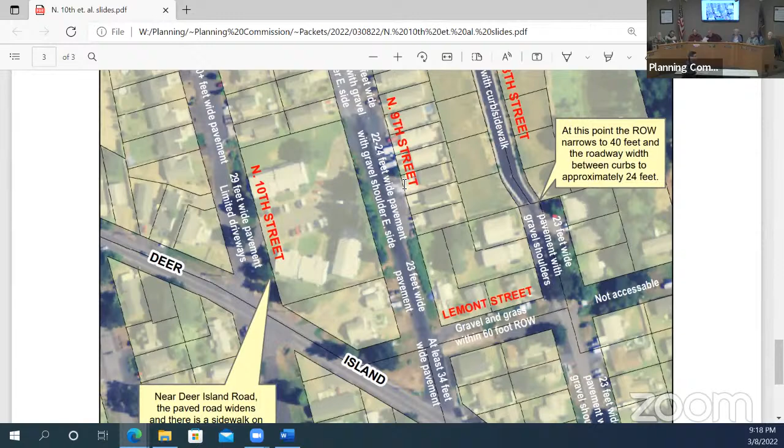I deal with this question on a lot of projects in a lot of different jurisdictions, and in my opinion, it's just not fair, because people are trying to put housing in place for folks, and there's a point where if you start putting too many of these expenses on the developers, it's not going to happen.

I know that, for community travel. It's just that he's got a great development there with good sidewalks and the whole bit, and you go through the section there and it's just disconnected. Yeah, I mean, I guess I would hope that's what some of the other pieces are collected with.

I think there was a question about potential mitigation of runoff, and there was a concern raised about that with regard to the storm water.

Sure, so that's probably the thing we've taken the most extensive look at so far. The approach on that is this overall system, with no greater outfall than the current situation.

So we've got several different storm facilities proposed that are going to detain and treat the storm water. When you put in hard surfaces like we're doing here, runoff occurs at a greater rate. To counter that, we put in storm swales, ponds basically, that detain the water for a certain amount of time, biologically treat it with plants, and then meter the outflow, so theoretically that outfall is at no greater rate than the current condition.

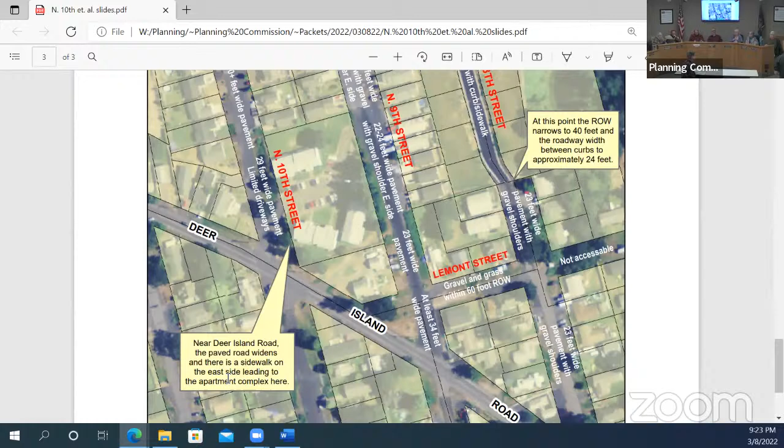What I'm looking at, is there gonna be any on-site parking on these lots? I'm reading this, no, they'll be on streets. On site? Which sheet is that cross section on, Chase? Yeah, there's no exception, it's required, there's no exception to the parking requirement. The off-street parking requirements still stand. So the driveways will be put in.

Yeah, as they do it, because it sounded in here like it was as each person decided they wanted. Oh, it may have been, there's a lot, it just may have been the volume. I was pressing leaves all week. Yeah, no, I was just curious, the way I read it, it was like, and there was, one of their sheets showed driveway and stuff.

So it is contemplated in there if you kind of bury through everything, but there's no exception from off-street parking requirements. So the 4-foot side yard is wide enough for a carport? The side yard is the distance from the side property line to any building or structure. Right, no, I understand, so you're still gonna have a garage or carport or just a pad. Okay, so the pad will be in place. Yeah, like I said, off-street parking is not exempt. Okay, that's what I wanted to know.

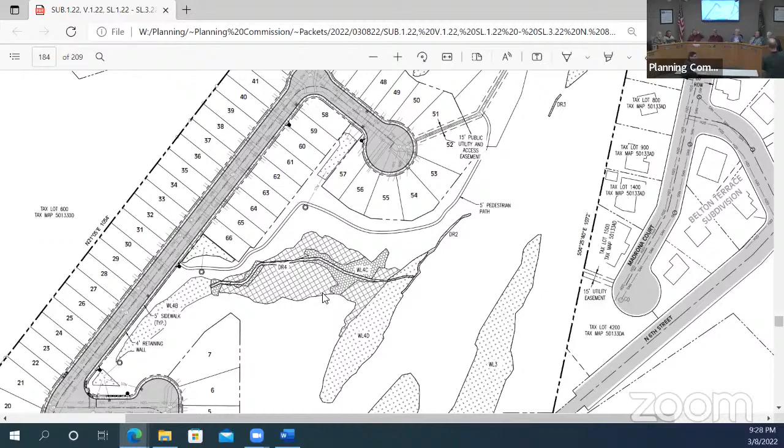Could you move that image up a little bit? The other way. Oh, yeah. And over, to the left. Yeah, there we go.

So, Andrew, the stormwater facility in that corner, this one, you didn't mention is that DEQ requires you to treat all the water going off of your site. Sometimes that means you have to treat the water coming onto your site, and that's a tough pill to swallow if it hasn't been treated by some other development.

And that's the case here, where there's a lot of water coming off of 10th Street and 9th Street, and even 8th Street I believe, and off of the county property onto this property, pipes just sticking out there. And they've got to treat that.

That water was just looked at as a nuisance previously. You just put it in the pipe and got rid of it so it wouldn't cause any problems. But the more appropriate, modern approach is you manage it responsibly.

As Dan mentioned, we're inheriting this, whatever you want to call it, previous practice of just getting rid of it. This was the convenience spot to get rid of it. This is just one of many examples, in my opinion, where this project is cleaning up something that's currently less than ideal. So we're going to be taking that relatively high volume of water coming in from these three pipes and going to treat it and manage it, use it to help nourish these wetlands down in this area.

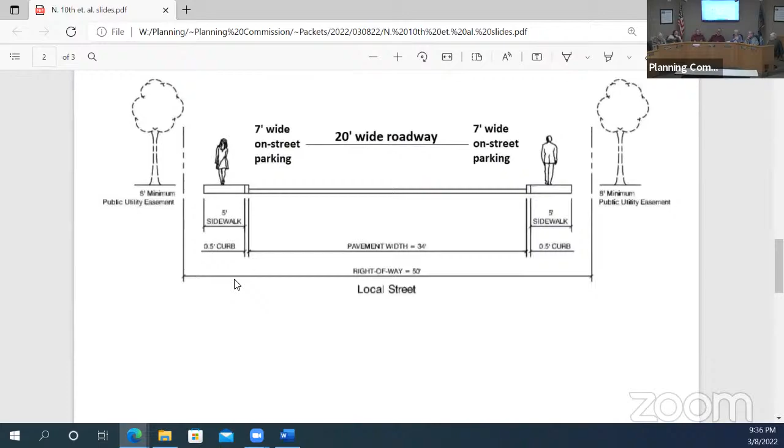I feel like with the configuration of this area down here, even if you punched a road over there, it's gonna be kind of on the edge and off to the side. Who's gonna go there? It might give the path of least resistance where you get wiggles. It's gonna wipe out several lots too. Yeah, that too, a lot of lots. The pedestrian one, I agree with that, we're using the easement that's there.

And it seems to go through whatever the stormwater area is, and then we're right on 10th. I don't think just pedestrian, no traffic... I need a boardwalk. Well, that'd be fine, yeah, a wetland boardwalk the whole time. I don't think that's gonna solve any of the issues from people walking down 8th Street. I guess I find it hard to believe they're gonna walk all the way across and cut through that pedestrian area to get to the highway. So you're still having issues down, the majority of your lots coming to that corner.

My thoughts on the 10th Street, whether we eliminate some lots... I think that the developer actually has a very reasonable proposal as far as dealing with a lot of wetland issues and mitigation, and they've offered to install a public trail which can connect down to the public trail to Dalton Lake. The developer's already taking on a lot of expense to try to mitigate stormwater runoff and make sure that the water that does come off this is treated as it can be. So I think adding a lot, I don't think adding the additional burden of a street is necessary.

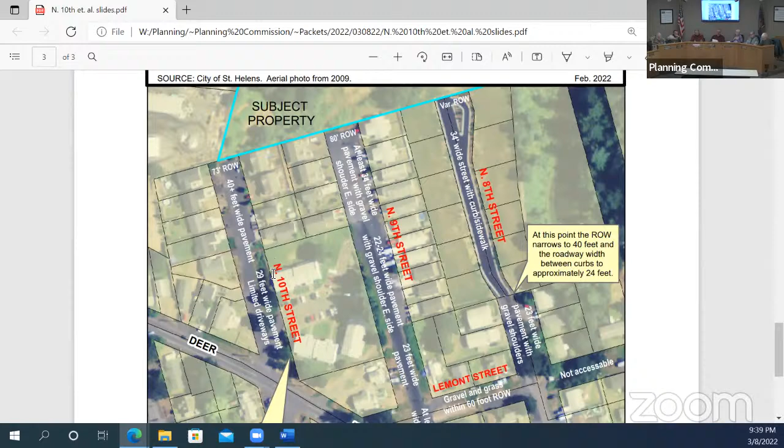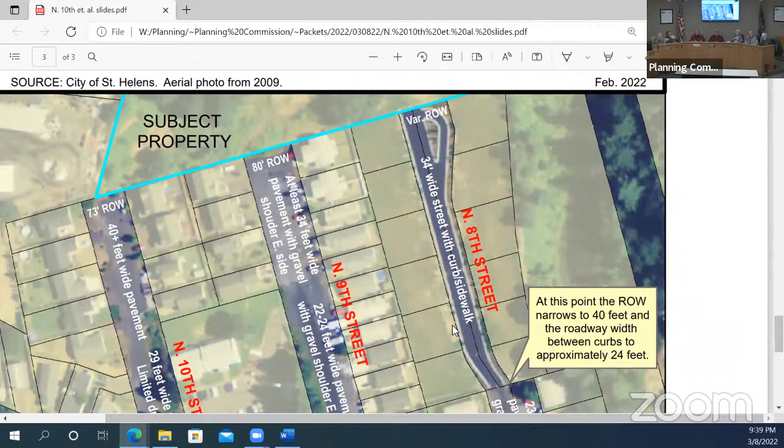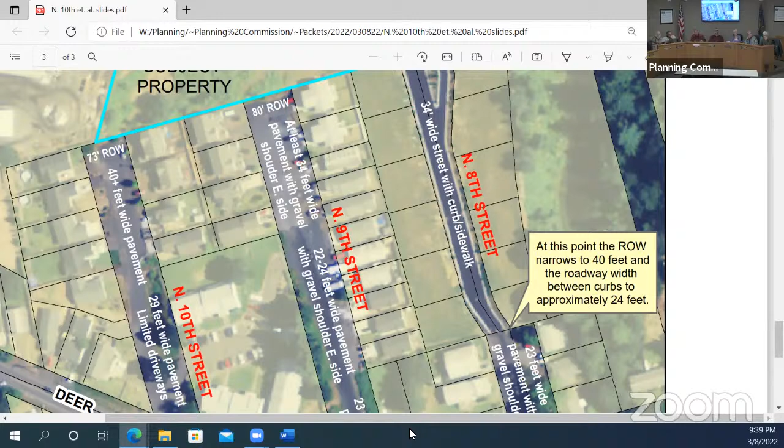So the new subdivision in the neighborhood is what was formerly known as Eagle Lakes Bluff, and we do have sidewalks there. In fact, this is the standard 34-foot wide street, except right here it narrows down, just that little point there. So 8th, which is the longest distance between the subject property and Deer Island Road, at least a portion does have the sidewalk. But then the rest of it, you get down to this 23-foot wide pavement with gravel shoulders. At least you do have gravel shoulders here.

Sidewalks along here too, along the apartment complex. Thank you, Jenny. There is a private sidewalk, well, it's in the right of way that kind of goes like this. And that just shows why 10th is a little bit more favorable for pedestrians, because you have a little bit of a walkway here. This area is narrower, but there's not really any driveway approaches.

And then up here where there are a lot of driveway approaches, I mean, geez, it's 40 feet or wider of pavement. If you're not familiar, Lemont Street is not a road there. It just stops at 6th Street. Well, actually it extends a little bit more, across the street, Third. Did they pave one block to the west? Very narrow.

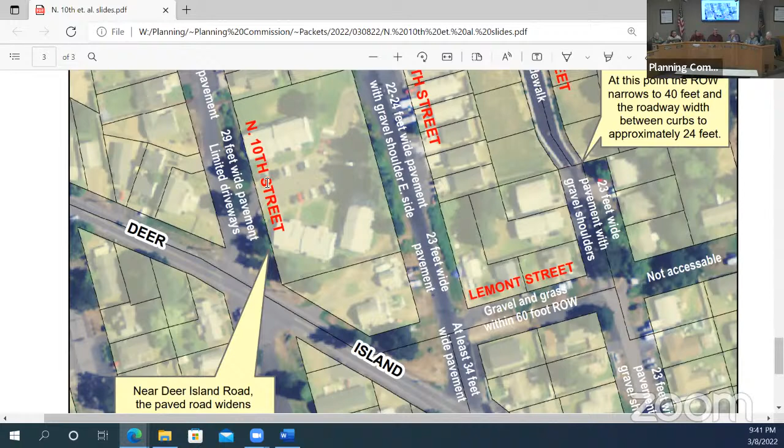I'm just trying to maybe address what you were saying about pedestrians there, but I have issues with putting that on the backs of the developers, that they put sidewalks in established areas already, so. I just wanted to bring that up.

There was one instance where we did have that, Hankey Road, for some of you who've been around here a long time. Elk Ridge, this was several years ago now, but Elk Ridge was starting to blow up, and there's one way to get into town, and that's on Hankey Road. It's already a narrow county road, and so

it was a condition to install the sidewalks, and there wasn't any resistance. Of course, when it was in bankruptcy, when someone was purchasing the property, we told them up front, this is a very real condition, so it wasn't a surprise. But that was, the circumstances there were pretty extreme. If that helps.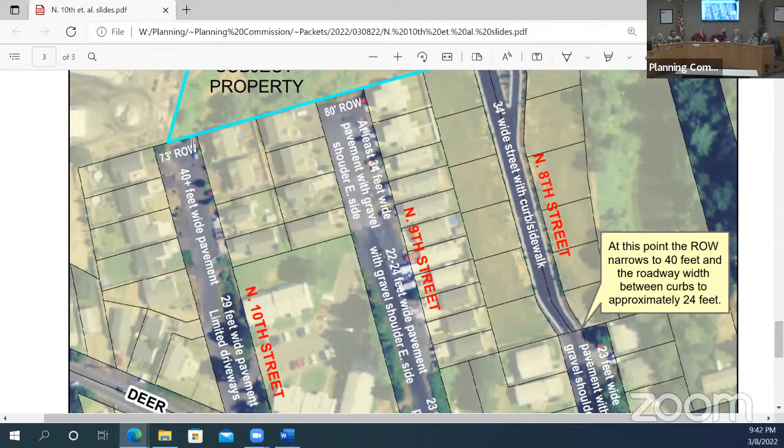Anything else about 10? So it sounds like we're all leaning towards pedestrian pathway, a right of way easement dedication, that's what I'm trying to say. And that's just for if the city county property were to develop, the road could continue on. Yes, right.

The right of way dedication's there, 100 years, 50 years, 200 years, it's there to be extended. What else are we going to tackle?

So another item that we kind of addressed, I just want to make sure that, like you've discussed it, are the offsite improvements. We talked about street, you got into the offsite improvements, the 9th or 8th and 9th. It doesn't sound like there's much drive to want to require any of that. It's the last call for that discussion, just to make sure you're all firing on the same.

Talking about the sidewalks on either. Yeah. I think again, that burden on the developers probably, I don't, although it might be desirable, maybe something the city could look at in the future, but it sounds like the developer already has a lot of challenges with this site. Lots of money to get. It would be nice, but it's not his burden.

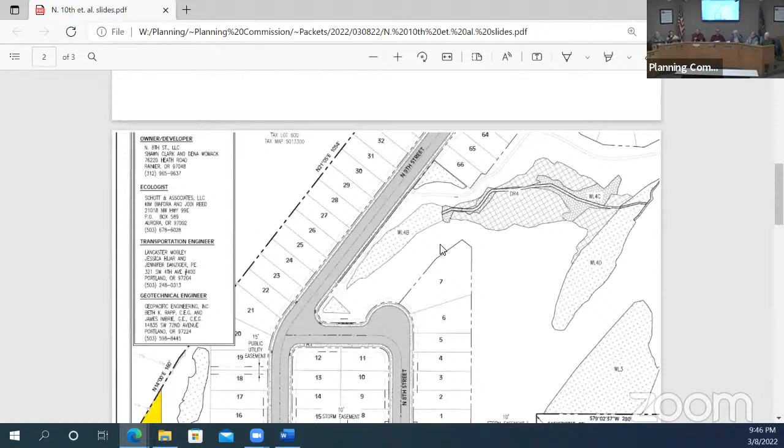Going back to my original concern about the overlay, we have no opportunity to ask specific questions about the development, about side yards. That would probably be good to bring up during the public hearing. It's in the record. The thing is, our code says you could just not have a standard at all, and they elected to have a smaller standard. So whether or not you could attack the standards, I think it'd be a tough one.

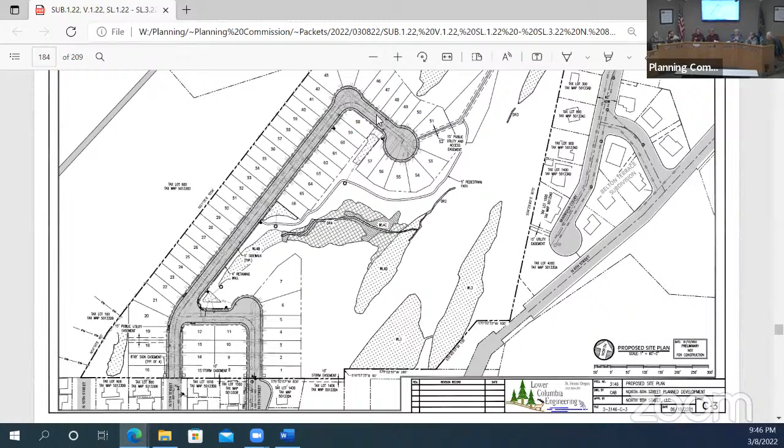Would you like to talk about the standards they propose? Well, a lot of it's on that table. What standard is concerning me is minimum side yards, where residential zoning is 5 foot for interior lots and 10 foot for sides of corner lots, and that becomes 4 foot on all sides. Yeah, it was 4 feet that I read.

So one thing about that 4 feet on all sides, on corner lots, you're still gonna have a public utility easement that is greater than 4 feet. That's gonna keep buildings further away from the corner sides, and there's not a lot of corner lots. The normal side setback is 5 feet, and they're only reducing it by 1, so it could be a lot more extreme.

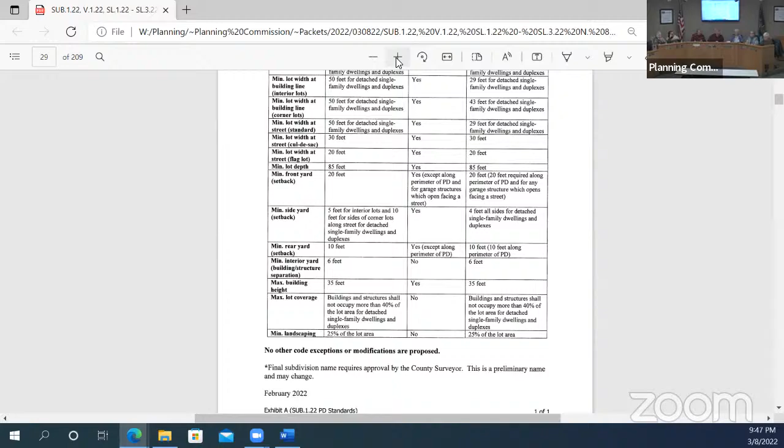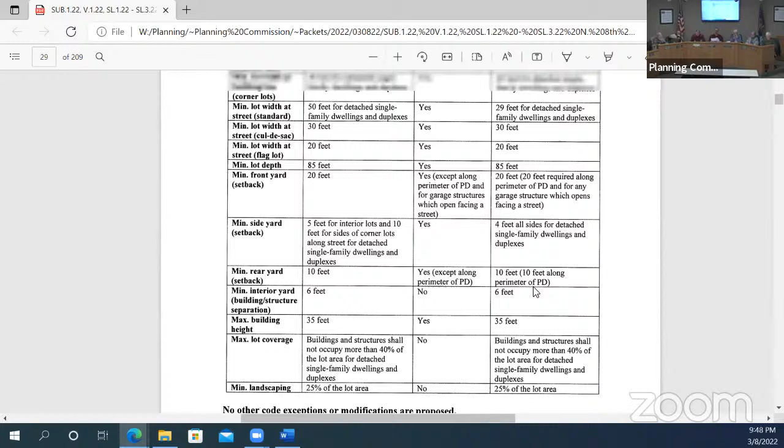Size going down to, they're proposing 3690 square feet for detached single family. That's the standard they get to set, if I'm understanding it. Yes, and they could say there is no standard. I recommend that there is a standard, because it's less chaos in the future. I always have to think about, okay, well it gets built, but then we're dealing with it forever, and having dealt with other planned developments, you're trying to figure out what in the heck did they approve. That's why I'm a stickler about having these tables in there, so it's easier for planners of the future to know what planners of the present were doing.

Being a real estate broker for almost 30 years and seeing HOAs are only as good as their boards, as their policies, I have a hard time not looking at the future of the neighborhood.

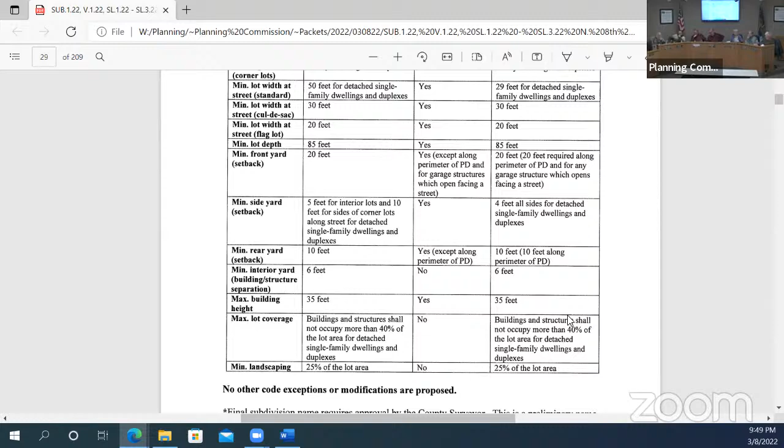Things like where it says each structure will have an outdoor private area greater than 48 square feet. So some of the criteria that the applicant addressed don't even apply. Yeah, that's a multi-dwelling standard. This isn't a multi-dwelling development. That could have just been crossed out or whited out, and it would have made no impact on the fate of the application.

Is that Red Leaf by the DMV? That was the subdivision formerly known as Red Leaf, now it's called Greystone Estates. Well, I was gonna say Greystone, but anyway, after driving through that a couple weeks ago, 4 feet sounds airy to me. You can't touch the wall. Over there, you're lucky if you squeeze through.

I probably should ask this of Andrew when he was up earlier, but the plan that's been presented, there's only one plan—were you given alternatives of street design that would have addressed the traffic study showing all this traffic going down 9th? If this was rearranged a little bit, so 8th is the major street and 9th is just a little side thing, more traffic might go down 8th. The question is, when a traffic study shows all this traffic going down 9th, does that beg the question of whether this needs to be redesigned so it spreads the traffic out more?

Sure, and that's where I was kind of talking about, it's not what we do with 10th and 9th—just as we talked about in the variance, it's the brunt of the traffic. Over the years we've been dealing with this, the first plans we had Northwest Engineers on it, the second design firm was Westlake, and then finally Lower Columbia. I saw the plan evolve over time, and with this last one we got, we asked how do we make this work. Okay, we can make this work potentially with a subdivision, a planned development, a subdivision variance, and a sensitive lands permit.

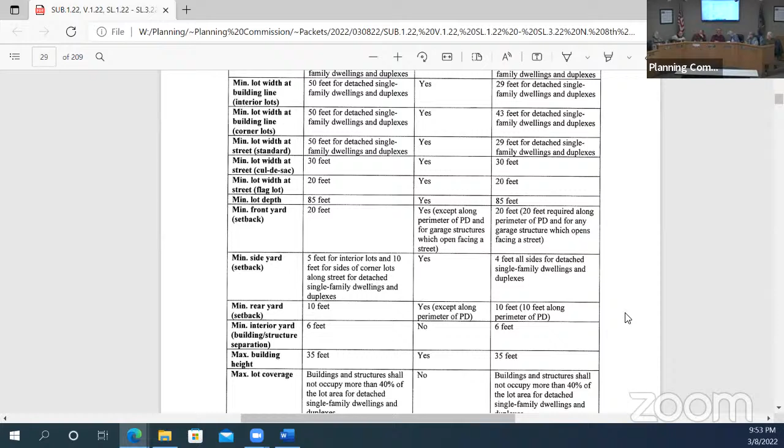I will insert one thing - it was the developer that chose this plan. It was not forced by the state or federal government. I wasn't involved with it, but they chose it because they wanted less mitigation.

Fire sprinklers are expensive - 44 lots of them will be sprinkled. Well, because if you look at where the single access begins, that's north of where 8th intersects 9th, and the majority of your lots are beyond that just because of the layout.

Preventing another Crestwood Village where you can't - yeah, Crestwood at least has that emergency access off Madrona. I know there's some topography issues.

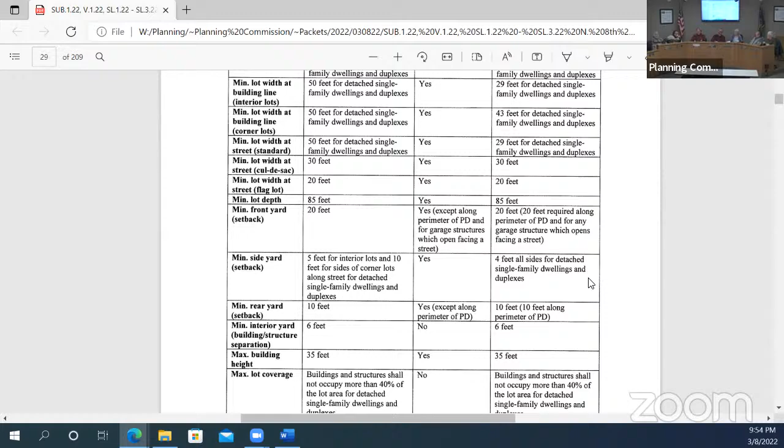I want to ask Andrew a question - about getting an emergency access into the manufactured home park to the north, taking out a unit, whatever. Has that ever been considered? How would you ever do that in adjacent development that's already developed? Well, you would stub to it - have a street stub, and that doesn't get you the access immediately, but it prepares you for it.

Now, Crestwood isn't that old of a manufactured home park, and I imagine it'll be there for a long time, but we have to think long-term. I will say our transportation system plan does have future street networks identified, and Crestwood is shown on that network, but where that street is, it's talking about taking Oregon and looping it to Madrona up here - there's a little street stub beyond the border.

So there was no street connection shown in the transportation systems plan, and that's why I didn't talk about trying to stub to Crestwood.

My question is, if they were to show a stub, would that preclude them having to have sprinklers? No, because they would have to stub and then negotiate with the manufactured home park to take out a lot so they could connect with the private street system - not just a stub, a real access.

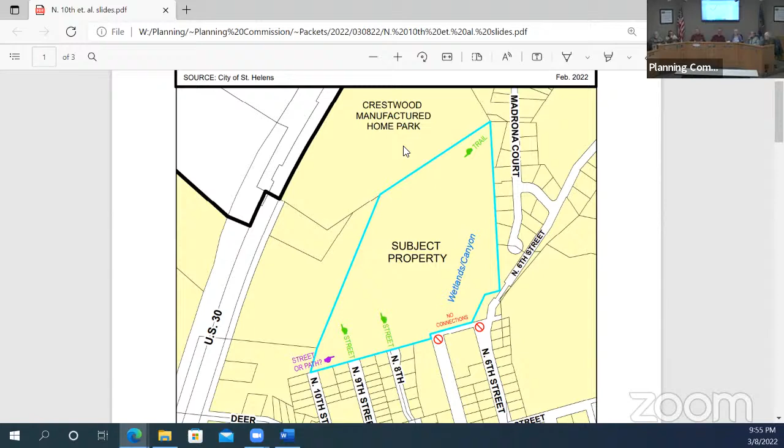Yeah, because real fires happen, and fire apparatuses don't fly, they don't jump. So until that time, we need a continuous road.

Find a solution there for Sean. I mean, I did think about that going through the report, and stubbing to Crestwood, but there's topography issues too.

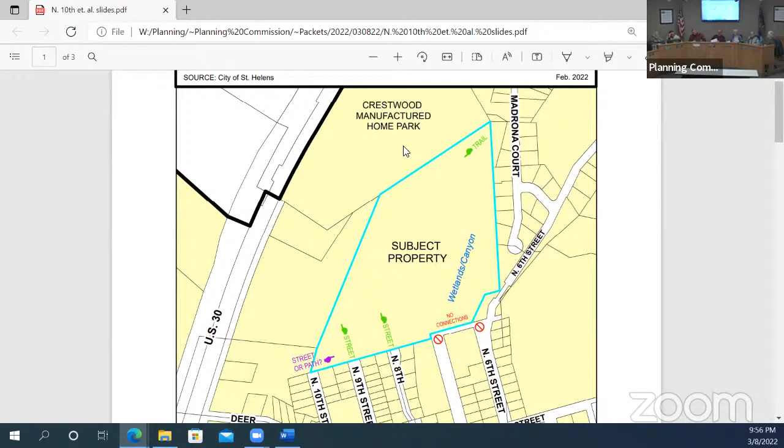So we're okay with the rest of this, as far as we can tell.

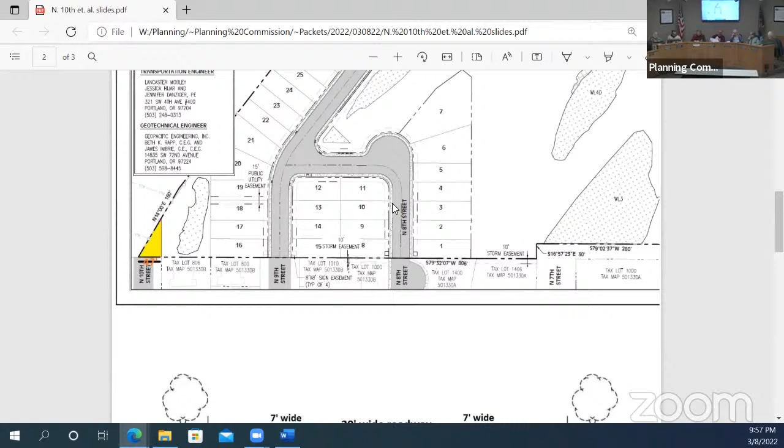A few things thrown in there like a new sign, a monument sign, requiring a sign permit - shouldn't propose that, they talk about it. They talk about having entry signs, and they actually identify them there, you can see the little easement. So we just said, yeah, that's cool, need a sign permit. Nothing special there.

Anybody else have anything to say? Yes, sir, we will - ready to make a motion.

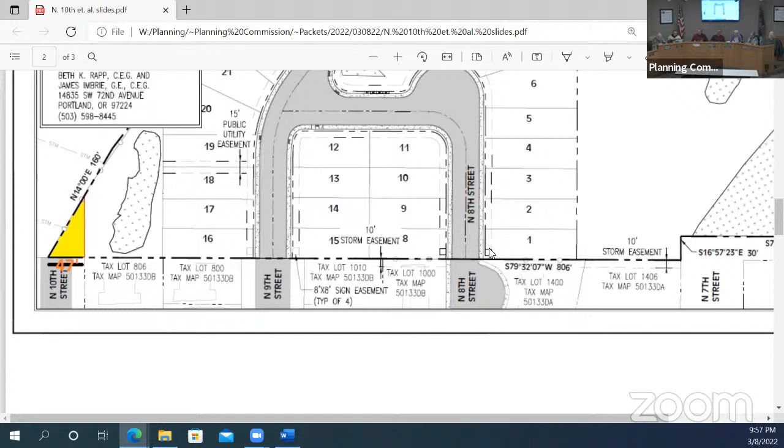There were two methods we were supposed to decide between. In my discussion of the staff report, I talked about that House bill that says we have to provide the option to allow the final plat to get recorded before all public improvements are completed. Because of that state law, that condition used to be simpler. The old way was just completing everything, but now we're obligated by state law to provide that option, and that's what's reflected in that condition.

So all the sensitive land permits are for impacts to the buffers around the wetlands, is that correct? That's correct, not to the wetlands themselves. A lot of those are from the logging activity. The new one is the sewer line and the pedestrian path, so it's catching up on the previous work.

So what happened is there was the logging issue. We went out there and saw some bad stuff had happened. So we worked with the applicant to figure out what the impacts to the city were, and then decided we'd tackle that when the subdivision happens. The stuff from that time period is all documented, so it was kind of delayed. We decided we wouldn't turn this into an active enforcement case, we'd just resolve it with the subdivision, because that was the efficient thing to do, and they were cooperative, so there was no need to get messy.